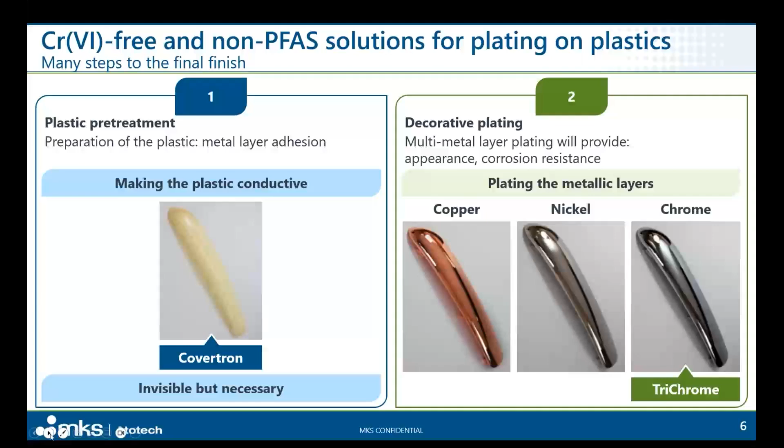Here's a short update on REACH regarding the chromium trioxide authorization status.

This authorization is still pending. I would say this CTACSub authorization or application is still pending, which mainly consists of two uses in the plating industry. One is use 2, functional chrome FC, and then use 3, which is more related to the audience today in the room, decorative plating on plastic applications.

So the update here is that this CTACSub application is still pending, and there's no decision made. There's no update expected in 2024. And all this application is still under the Annex 14 legal framework, and the application process is still ongoing.

The update also is that all these users or applicants under CTACSub are allowed to continue using chromium 6 under some terms. For some users using functional chrome, which I don't think is the case in this room, but in case there's audience using functional chrome, there's a monitoring procedure which is mandatory under this Annex 14 application.

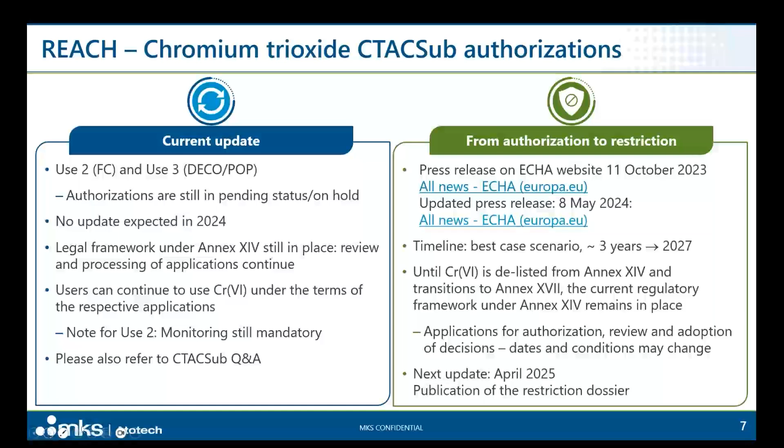Thank you, Johnny. Very warm welcome from my side. My name is Ernesto, and today I want to present to you the chrome-free and non-PFAS plating on plastic process from Atotech. The name of this process is Covertron 600, the chrome-free etching process for ABS and ABS-PC from MKS Atotech.

At a glance, we can say that it is a chrome-free process. It develops a similar etching pattern compared to benchmark sulfur-chromic etching by a chemical oxidant pretreatment. And as you can see in the SEM pictures on the screen, the process develops a pattern that is very close to the standard one from sulfur-chromic etching.

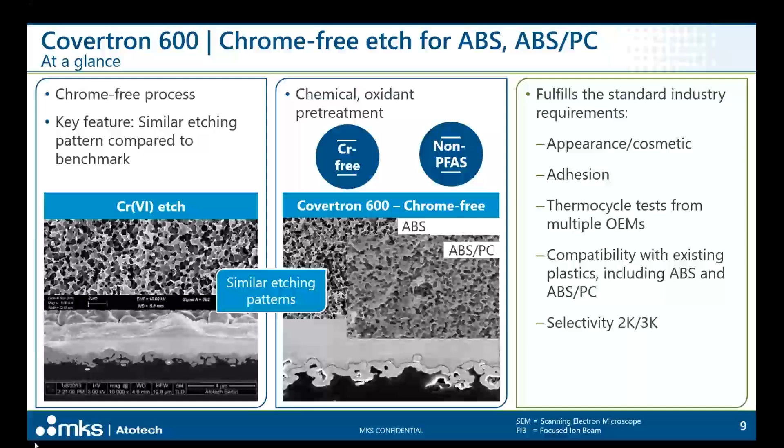The process Covertron 600 fulfills standard industry requirements in terms of appearance, adhesion, and thermocycle tests from multiple OEMs, is compatible with existing plastics including ABS and ABS-PC, and is able to work with selective plating. So we can plate selectively 2K and 3K parts.

The process sequence is also on the screen and allows, as you can see, a real drop-in solution, as there is no pre-etch or any intermediate step required to go to the etching step, and it can work as well with any kind of pre-treatment or post-treatment after the electroless nickel.

So whatever is currently in the plating line, being this immersion copper, nickel strike, or copper strike, can work with the Covertron 600. So this is what we say: it's really a one-to-one replacement for the sulfur-chromic etching process as we know it today.

When comparing with the existing benchmark process, the first thing you can see is that the Covertron 600 works at 35 degrees. This is already an important advantage, as besides energy savings from this lower operating temperature, it will also help when etching the parts to avoid potential dimensional changes in the racked parts, which can later contribute to stress in the plated work.

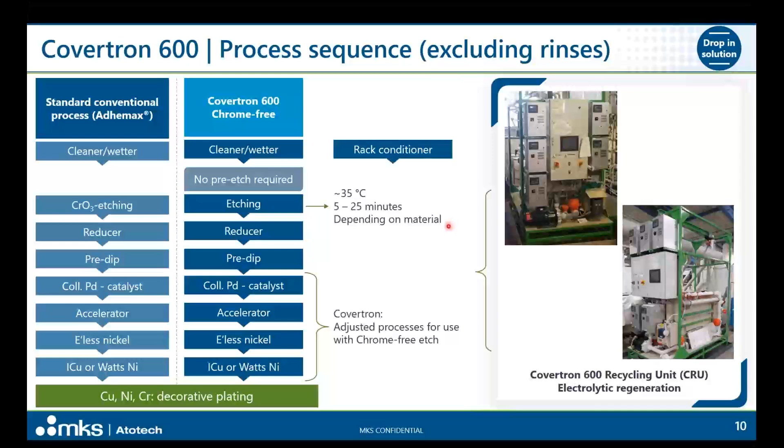What is also important to mention is that for regular production, together with the chemical process, we need to work with an electrolytic reoxidation unit. This is a recycling unit called Covertron 600 Recycling Unit, or CRU, which will help to keep the process running stable over the production time. This is absolutely necessary for regular production.

The process sequence in detail for a conventional plating on plastic process shows here how the Covertron 600 will replace the current sulfuric-chromic etching, and how it's really a drop-in solution, because we don't need any kind of pre-etch here.

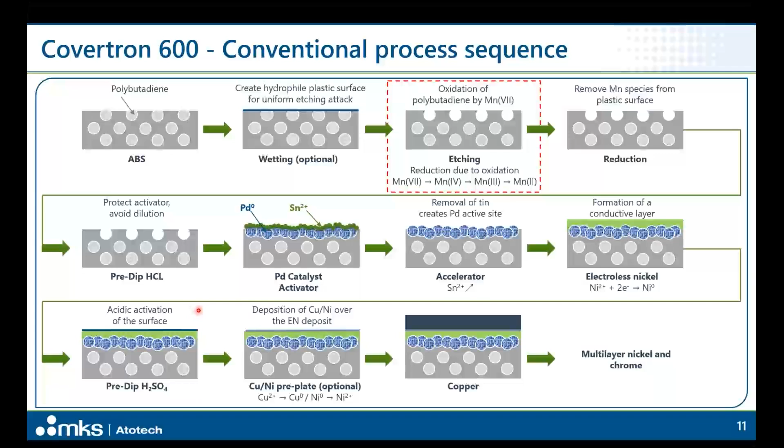And of course, we can also work with any kind of post or pre-plating after the electroless nickel. We can work with immersion copper, a copper strike, or a nickel strike.

The Covertron 600 process works with two additives, the Covertron 600 Part 1 and Covertron 600 Part 2. Both of them will influence the etching pattern of the plastic substrate, and both are important to create what we are looking for.

As mentioned before, the etching time will depend on the base material, the resin. The molding conditions will also play an important role, like currently with sulfuric-chromic etching. The regular etching times with Covertron 600 for ABS normally move between 8 to 15 minutes, and for ABS-PC parts, 12 to 25 minutes for special materials.

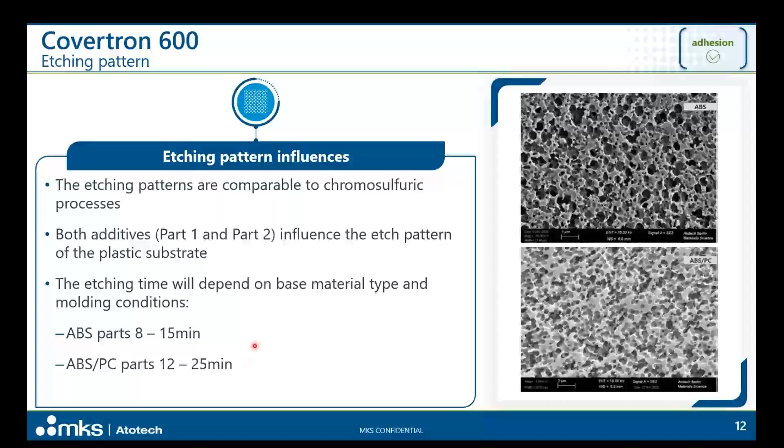In terms of thermocycle or shock test, the results with Covertron 600 for thermal cycling or thermoshock from many different OEMs have been and are really very good. We fulfill the requirements of many of these OEMs.

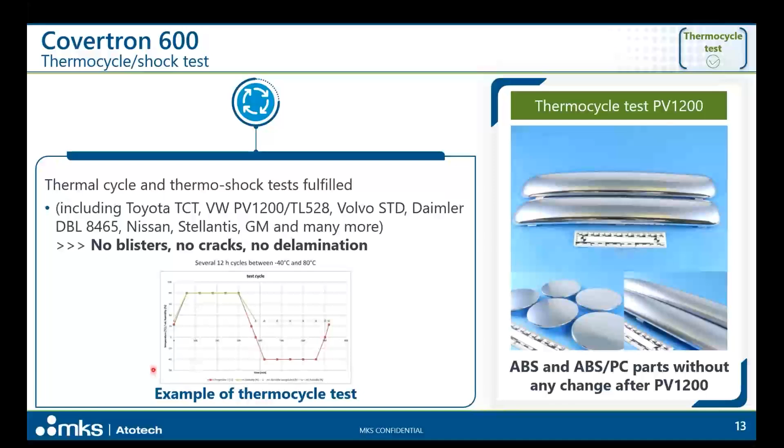Another important topic is what happens with selective plating, and what happens when we need to process 2K and 3K parts. The Covertron 600 works with selective plating, and the selectivity we can achieve is better than, or at least equal to, the benchmark process.

If necessary, longer etching times will be capable of removing any slight molding skins that could be on the surface of the part, and this is comparable to the sulfuric-chromic etching.

We confirm this because currently our customers are in production with 2K and 3K parts with very good results, so this is confirmed by production. Here you can see an example of selective plating with our Covertron process.

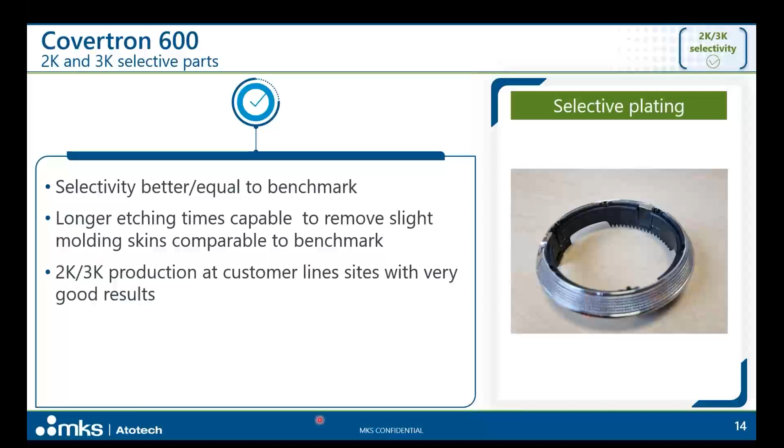One important question from your side will be, what happens with the materials? The substrate compatibility is good with the Covertron 600.

We can share with you that the list of plastic substrates which have been processed through our Covertron 600 is long, and shows that the current substrate compatibility with this etching process is excellent, without it being necessary to modify the resin or change the existing resin by specific modifications to be able to process the parts through a chrome-free etching process.

No, we don't need to. We are working with exactly the same substrates that customers are working with in the current sulfuric-chromic etching lines. If we talk about qualified resins, we can mention for ABS and ABS-PC: Novodur, Starex, Polylac, Lupoy, Bayblend, Terluran, Cycolac, Techno-UMG. So you see that the list is very long.

We have had many samples plated in MKS Atotech POP lines in the last years, and customers have also had many different materials plated, and a database for different materials is available for our customers.

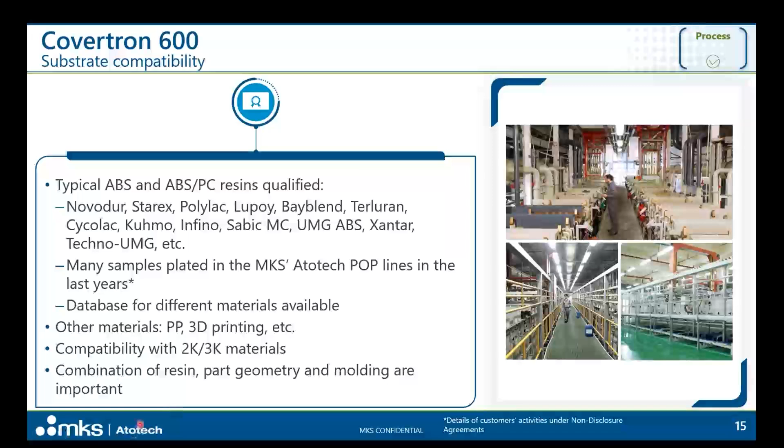And of course, we don't forget, and you need to have always in mind, that in the same way that today there is an influence with the sulfo-chromic etching, the same will happen with the Covertron 600. So the combination of the resin, the part geometry, the molding conditions are of course important to get the right result, or the right performance of the plating on plastic parts.

So about the fundamentals for the etching process and the reoxidation mechanism for Covertron, I will just show in the following slides. And here, of course, what we want to show to you is that the chemistry from Covertron 600 is based on manganese.

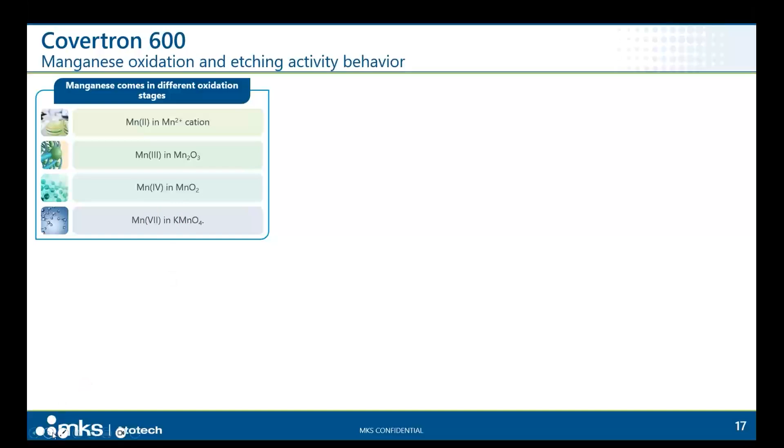This element, you know, comes in different oxidation stages, from manganese 2 to manganese 7. And in the middle, you have manganese 3, manganese 4. With a higher oxidation number, the oxidation potential of this chemistry of the manganese is higher. So we go into this direction, being here with the manganese 7, let's say the higher oxidation potential that we can achieve. With the Covertron 600, only this stage, the manganese 7, is, let's say, the active species that will work for etching.

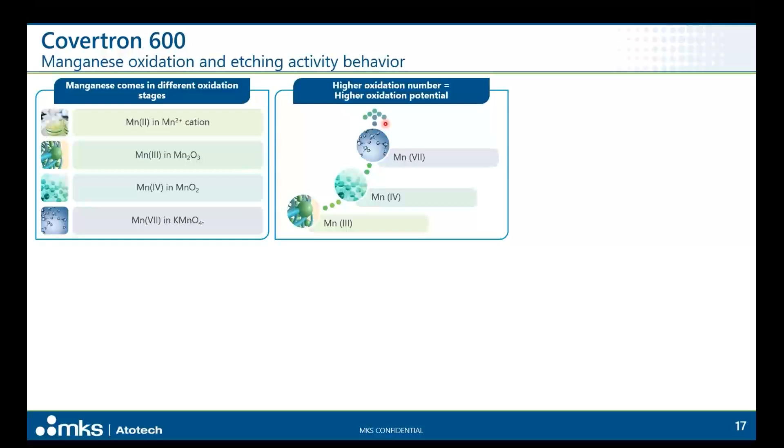So the Covertron 600 will work with a permanganate to be able to be active for etching. So in Covertron 600, this permanganate, the active species for etching, is introduced through the Covertron 600 Part 2 additive. This manganese 7, and according to the working conditions, is not active for etching for a long time.

So what happens is that this manganese 7, what will get is over the time, it will break down as a result of an autocatalytic reduction reaction. So that means that we will move from the manganese 7 to manganese 2, becoming, of course, non-active for the etching purposes that we are requiring. And remember, this is an autocatalytic reaction driven by time and will bring to these inactive species.

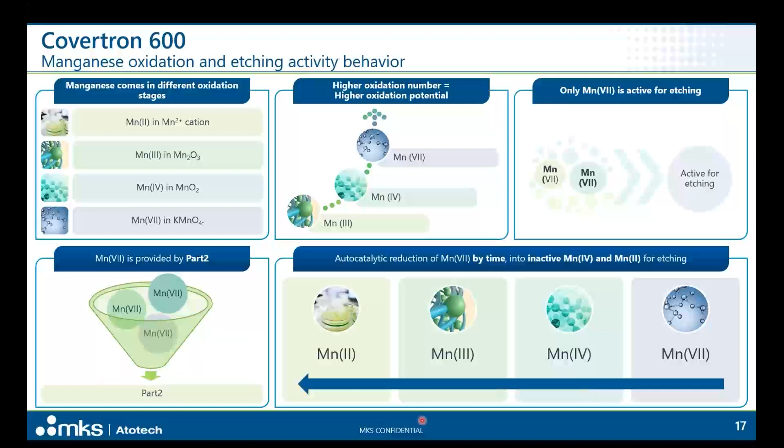Of course, when we discuss what is in this case the reaction that we currently have, is that the basics of the etching are chemical oxidation, and the simplified reaction is that the permanganate, the manganese 7, will be able to etch or to attack the double bonds of the butadiene through this Part 2, which introduced the manganese 7.

Of course, in this process, what will happen is that the manganese 7 is reduced to lower valence. Here you can see, in a simplified way, where we get the double bond of the butadiene present in our resin, and what will happen is that as a result, the manganese is reduced. So that is again shown in the screen how the manganese 7 will move from the active species to the other that will become inactive.

In the flow diagram that we showed to you on the screen, you can see as a summary what is the etching step. So we have the polybutadiene in ABS. We create the etching pattern by the oxidation of this polybutadiene by manganese 7, and finally, what we have is a reduction step that will remove any manganese species that could remain on the plastic surface.

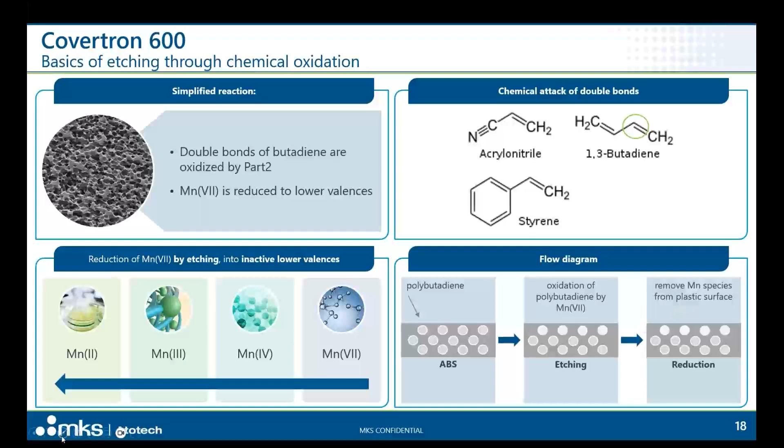So when we talk about the components of the Covertron 600 system, we need to talk about the chemistry. It's a manganese-based solution to etch the plastic, and you have seen right now the way that this solution is able to oxidize the plastic resin.

We need to talk about a regeneration unit, the Covertron regeneration unit, because this unit will help to keep the manganese 7 that you have seen will become inactive by this autocatalytic reaction. We need to reverse this and bring back all these non-active species of manganese to this active permanganate material. This is the task of this unit, and this will contribute to lower the running cost. This is very important because, as you have seen from the very beginning of the presentation, for regular production we compulsorily need to work with a reoxidation unit.

And finally, what we have is a spray application of the etching solution. You can see here a spray booth which will be responsible for putting in contact the etching solution and the plastic parts, and in fact will help create this pattern after the oxidation of the resin. But importantly, this spray application can work without producing any hazardous mist, and will allow the process to reduce dramatically the necessary volume of the etching solution that we need to etch our production parts, while at the same time giving us excellent metallization and adhesion results.

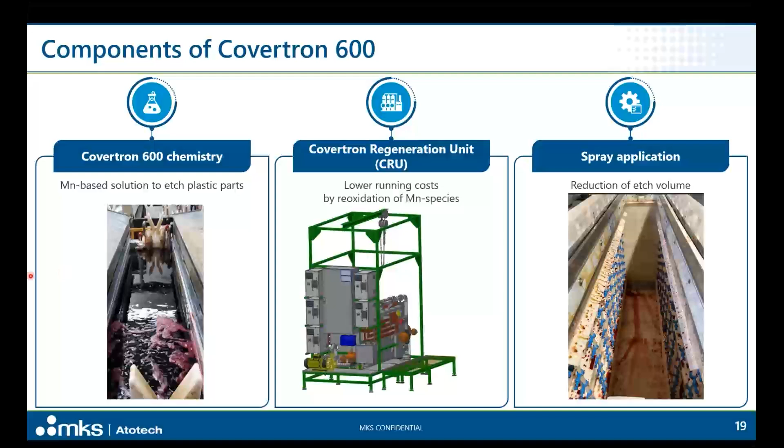In a description of the function of the different steps, what we can say about the solution is that the function of the solution is really to etch the parts.

What we can see in here on the screen is the process sequence, and we follow exactly the standard pre-plating process that we have in the current lines. With the Covertron 600, we can use the same sequence, but at the same time give the good adhesion of the subsequent metallic layers, which will be able to give the plastic part the right decorative finish, to be able also to get the right performance in terms of adhesion and thermocycling test, and the possibility to work with all the different materials, in this case, talking also about selective plating.

From this point of view, Covertron 600 fulfills all these functions, allowing us to achieve the industry standards. And as you can see here in the SEM pictures, the pattern is comparable to the benchmark process.

But of course, if we use one of the standard specifications in the market to check the requirements for peel strength testing, what we can see is that from a typical specification for the current process, with Covertron 600 we can achieve at least the same values, but our experience is that we can even get higher peel strength values than the benchmark process.

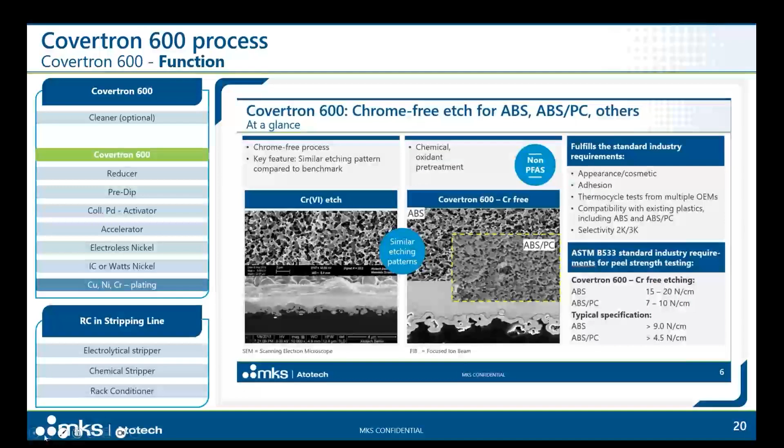The etching chemical solution, again, is based on a 3 additive system, and is based on manganese, which will be responsible to oxidize the butadiene and develop the adhesion.

As we have mentioned before, for mass production a special equipment is necessary to keep the process active. That is absolutely needed. This regeneration unit is called Covertron Regeneration Unit, or CRU.

The task of this regeneration unit will be to keep the concentration of this manganese at the right level as an active oxidation state. So we need to keep the manganese, but we need to keep it in the right oxidation state.

Also, the working conditions of the etching solution can be controlled and adjusted by the CRU automatically, because this auxiliary unit will be able to control the conductivity, and based on that we can do this control and adjustment. The additives must be replenished only by drag out due to the production, and always according to the analysis. We strongly recommend regular monitoring of the process by doing daily analysis, and monitoring the critical parameters that will influence the behavior of the process.

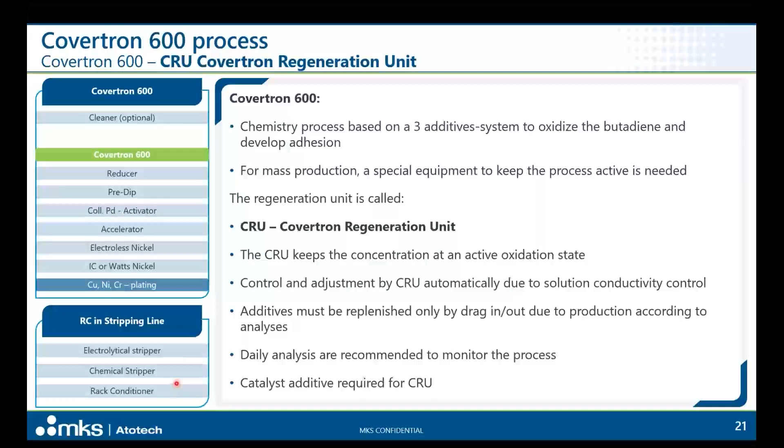In terms of rack conditioning, as mentioned before, in the stripping line we can install the rack conditioning to prevent rack metallization. The regular process sequence will be electrolytical stripping of the tips, chemical stripping, and finally the rack conditioner before the racks are sent back to the line for racking the parts.

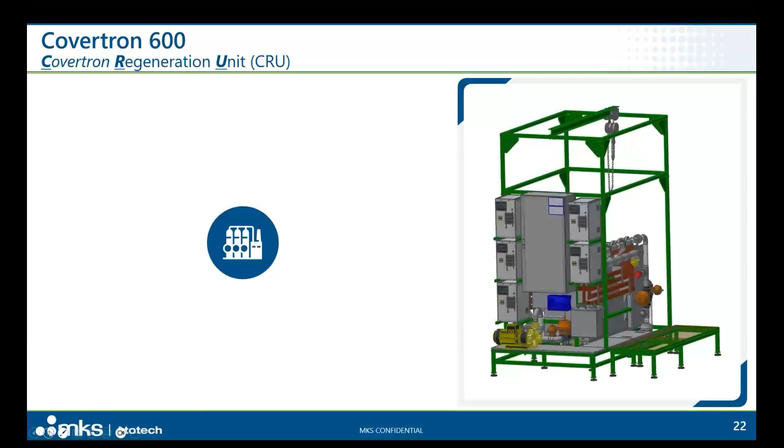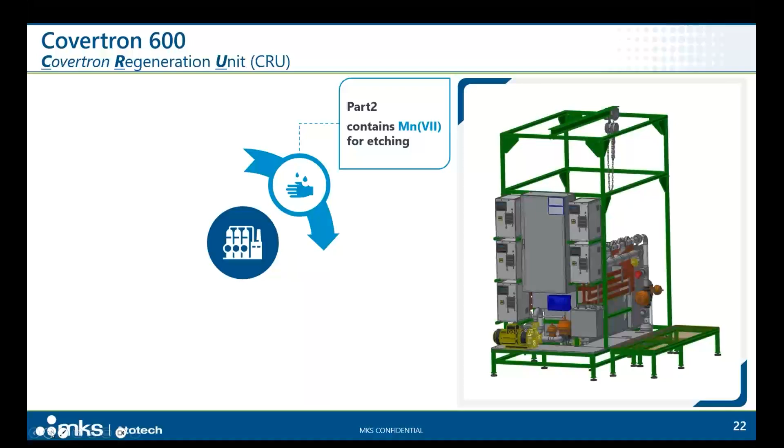So we talk here about the Covertron Regeneration Unit, and at a glance, to mention that part 2, the one containing the manganese 7, is what we add with our Covertron 600 additive package.

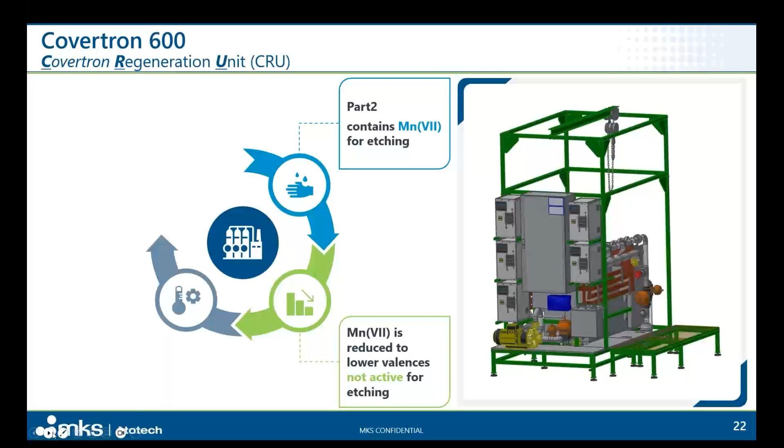This will work with the plastic substrate, and the manganese 7, which is coming with part 2, will be reduced to lower valence, becoming not active for etching. So here, what we have is that we need to consider that this reduction of the manganese 7 will come from this oxidation of the resin, but also as a consequence of an autocatalytic reaction, which will be accelerated by temperature.

And what this unit that you can see here on the screen will be responsible for is to regenerate this manganese, which has been reduced to lower valence, and to react or come back to manganese 7, keeping its concentration stable and allowing the system to continue oxidizing the plastic resin.

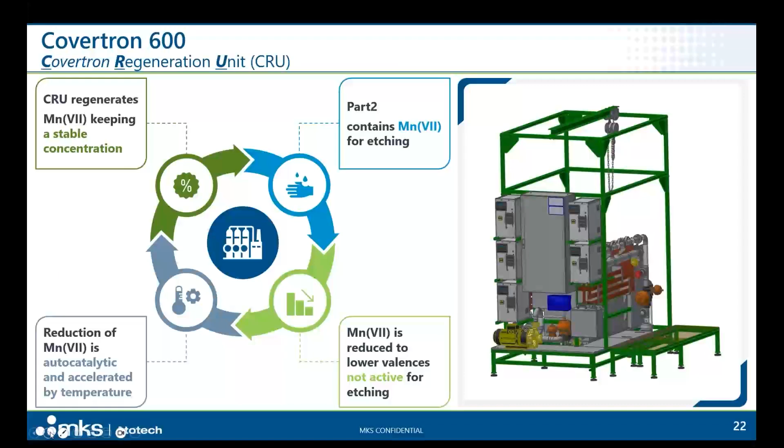Let me show and share with you the field experience that we have with the Covertron 600 from different countries and different customers.

Currently, with over 20 installations worldwide, most of these installations are working for automotive. Most of our experience with Covertron 600 is related to the plating of parts for the automotive market. Customers have validated the performance of Covertron 600 on ABS and ABS-PC for multiple OEMs. Also, selectivity is fully confirmed because we are in production for multiple 2K and 3K parts. The appearance, adhesion, and thermocycling tests have been passed, and we have met all the requirements.

The internal and external pre-validations of the process have been completed, passing all the requirements from the automotive industry. The process is installed at multiple customers in many countries and regions, and multiple PPAPs have already been achieved through different OEMs, with many of these PPAPs already ongoing.

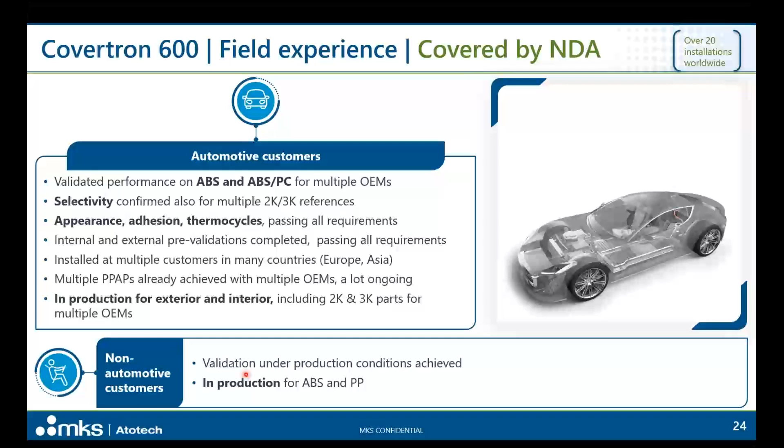Besides this successful introduction of the Covertron 600 to the automotive market, we also have non-automotive customers. With these non-automotive customers, the process has been validated under production conditions, and is in production for ABS and also for polypropylene with excellent results.

Here we are talking about the replacement of hexavalent chromium, chrome 6, from a plating on plastic line. Until now, we have discussed what happens in the pre-plating of this part. But if we want to eliminate the hexavalent chromium, we also need to consider the end of the plating process, meaning when we plate the decorative chrome.

Here the target again is to eliminate this chrome 6 from the decorative process, and for that we get the trivalent chromium process. Here we want to introduce the Trichrome family, the different processes that MKS Atotech can offer, from chrome 6-like color to dark finishes.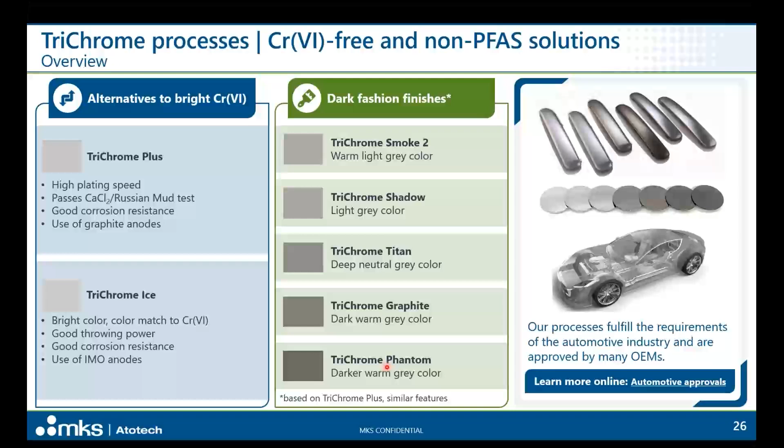Going a little deeper about the bright chrome finishes, working with the right multi-layer nickel system, Trichrome Ice and Trichrome Plus can offer excellent CASS results and excellent neutral salt spray results, in this case with the post-treatment. For the calcium chloride test, the results with Trichrome Plus are excellent, and of course Trichrome Ice and Plus will not offer exactly the same color.

When the main goal is to match the color from decorative hexavalent chrome, Trichrome Ice is the answer. With Trichrome Plus, we have very long experience. It's the process that has been and is in the automotive industry for more than 10 years.

From other markets, we have experience for over 40 years. Trichrome Ice, as mentioned, is the ideal solution when we need to match the hexavalent chromium color, and shows excellent resistance to the ACT test.

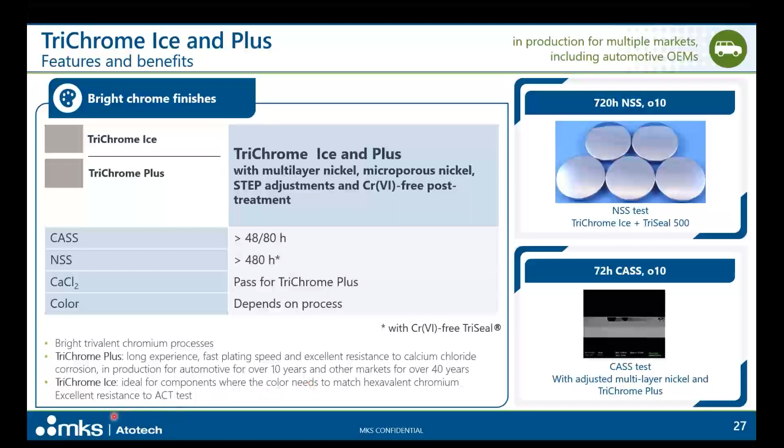If we go to the dark chrome finishes, the long-lasting processes with Atotech are Smoke 2, Shadow, and Graphite. These are again based in the same chemistry as Trichrome Plus, giving similar features, meaning good CASS, good neutral spray, good calcium chloride results. The color will depend on the different processes. We are able to offer processes with a stable color and a stable plating speed in production. These processes have been in automotive for many years, giving design departments the freedom to develop new finishes for customer requirements.

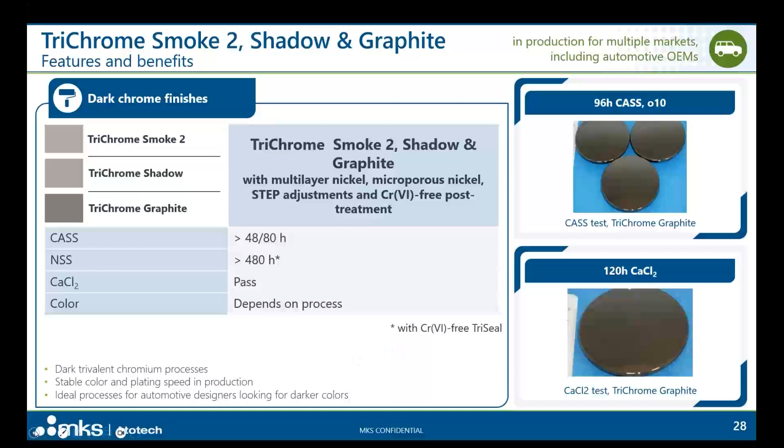Let me also talk about the latest introduction from Atotech, also in the field of dark chrome finishes, based in the same chemistry as Trichrome Plus: Trichrome Titan and Trichrome Phantom. Again with the right multi-layer nickel, giving the same excellent results. Trichrome Titan offers a unique color with stable good plating speed in production, a deep neutral gray color. This process is in production for automotive OEMs and is well appreciated for its specific neutral touch. Trichrome Phantom is the darkest shade given by trivalent chromium processes from Atotech, also in production for different OEMs, giving a real deep, dark, warm color.

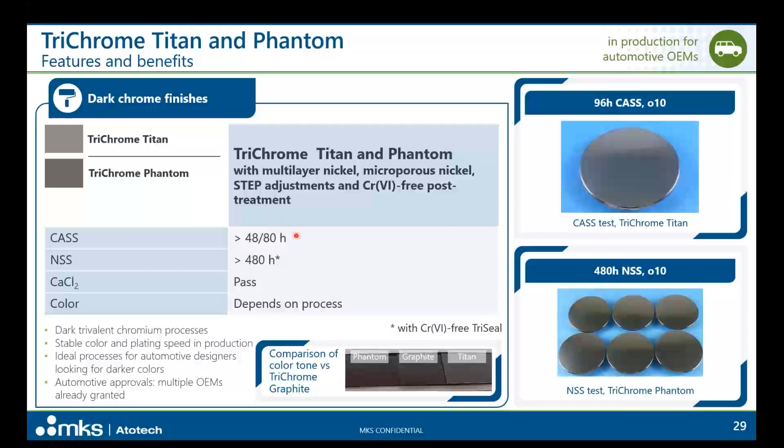When talking about chrome-free or chrome 6-free plating processes, we also need to consider the post-treatment after the trivalent chromium process. These post-treatments are recommended when we need to fulfill requirements in neutral spray corrosion resistance. Here, MKS Atotech can propose two options. One process is the Tri-Seal 300, a post-treatment which will improve performance with neutral spray test, applicable on bright colors only. So the Tri-Seal 300 will work for the Ice and the Plus, and with this we can achieve more than 480 hours in neutral spray.

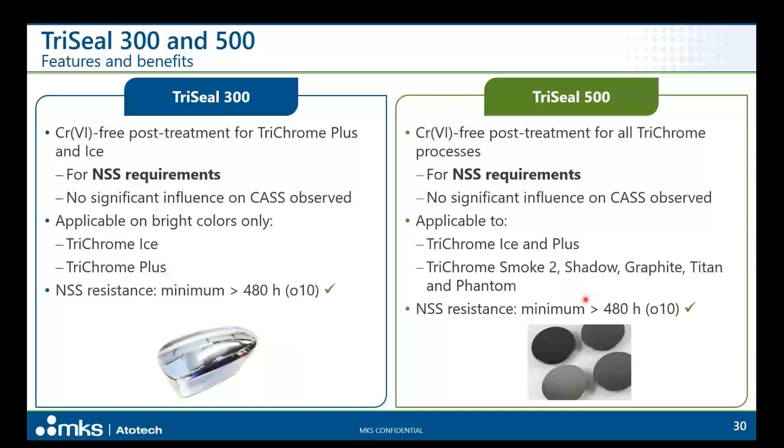We can also propose the Tri-Seal 500, which is also a chrome 6-free post-treatment, but in this case for all the trichrome processes. Again, the requirement is focused on neutral spray corrosion resistance, so there is no significant influence on CASS. The performance of this post-treatment is good with all the trivalent chromium processes, being bright or dark. In this case, we can also achieve more than 480 hours in neutral spray test.

So, last but not least, the final chrome layer is a trivalent chromium layer, and we need to consider that in any case it's part of a multi-layer system — it's more than just trichrome. To achieve the required performance, the appearance and corrosion resistance start already from the copper and nickel layers, so we're working with a system. MKS Atotech has over 40 years of experience with trichrome, and our patented multi-layer system and trichrome solution will help you reach the highest corrosion requirements of the automotive industry for exterior applications, achieve different thicknesses, and do this without chrome 6 in your plating process.

So now, please allow me to shift the presentation to Johnny, and he will go through the summary and the outlook.

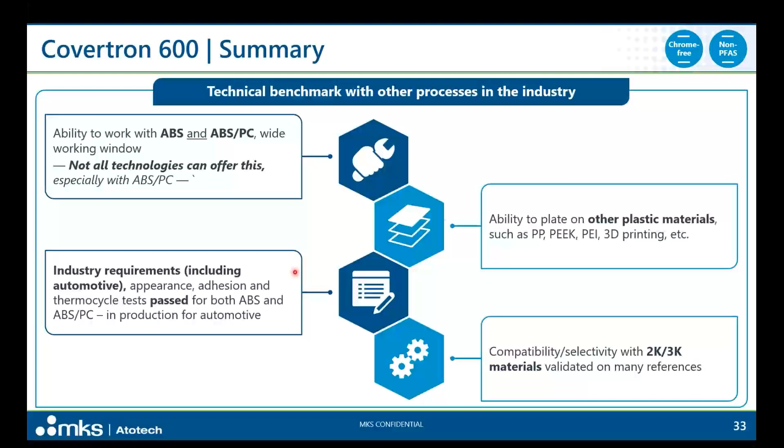I think we covered many topics, and for Covertron here's a summary. The most important thing is that this is an industrially proven process able to work with ABS and ABS-PC — I think this is the most differentiated part. Not all technologies could offer this in one line with one process step. It also passes all the industrial requirements for automotive and is a production-proven technology. Also, for different substrates and plastic materials like PP, PEEK, engineering plastic, PEI, and 3D printing material, we have the ability to plate on different substrates. And also important, for different applications like 2K and 3K material, we can use the same process for plating.

And supply chain consideration - this is a very important note for all of the audience today, because what we see is that for automotive or other applications, quality is very important, and there's a long and time-consuming qualification process needed if there's any major change in the process. So that is a very important and extensive job needed, including different stakeholders in the supply chain, including OEMs, tiers, our customers, also equipment and chemical suppliers like MKS Atotech.

And as I already presented to you, this restriction deadline is coming, and all I can encourage everyone, including our company, is that we need to prepare and act actively as early as possible. As a company, MKS Atotech is committed to this innovation and, very importantly, sustainability for all our customers and our partners in the supply chain.

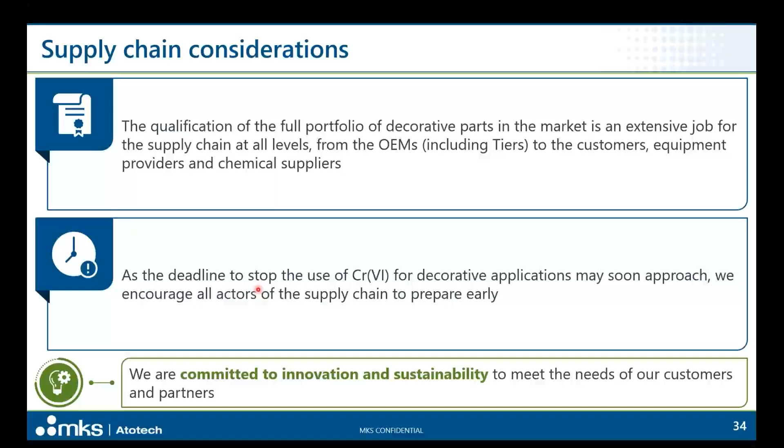With that, I think we'll close the presentation today, and thank you very much for all your attention, and thank you very much also to Ernesto for Covertron, for Trichrome non-PFAS application. Let's work together to make our world more sustainable. Thank you very much.